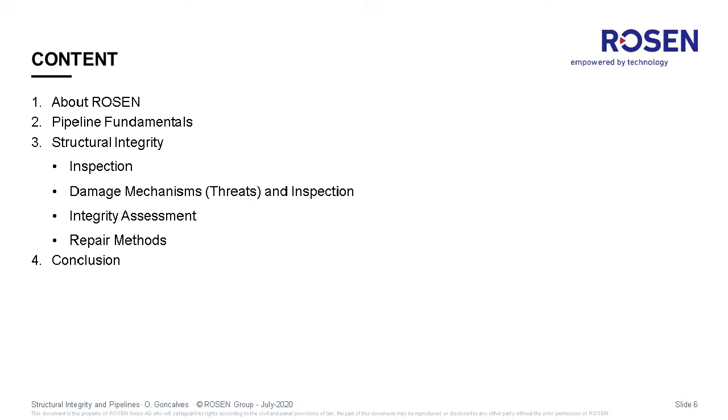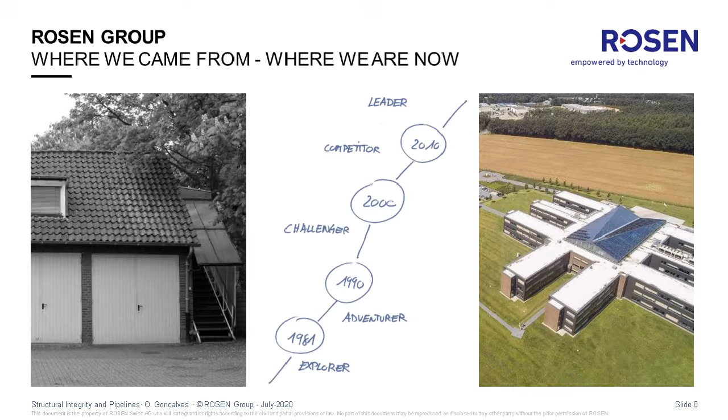Now a bit about Rosen UK. Since this is a presentation for the Northeast, some of you might have heard about MACAW Engineering. MACAW is a traditional engineering and consultancy company that was founded in 1996. And MACAW actually is an acronym that means materials and corrosion and welding. So these are the areas of expertise of the company. And in 2006, it started to do a lot of joint projects with Rosen, especially in the post-inspection work, which is the evaluation, the analysis, and interpretation of the in-line inspection results.

And this partnership worked very well to the point that in January 2017, MACAW became part of Rosen, and now all the services that we provide are under the Rosen brand. Okay.

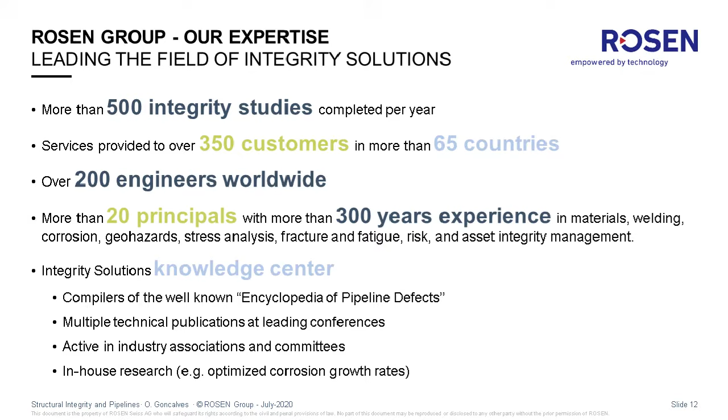Some numbers about the integrity side of Rosen, because Rosen is very famous for the in-line inspection work. For the integrity, maybe not everyone is aware of it, but we also have a big presence in this activity. So we have more than 500 integrity studies completed every year. We have 350 customers in 65 countries. Globally, we have 200 integrity engineers and 20 principal engineers. So quite a big team of specialists in different disciplines related to pipeline integrity and integrity in general. Okay.

Just some idea of some other services that we provide, not all of them necessarily related to integrity: some material testing, stress analysis, flow assurance. We also have a base in Brunswick, which is the test facility, and also an ILI office, which is related to the ILI business, in Silverlink.

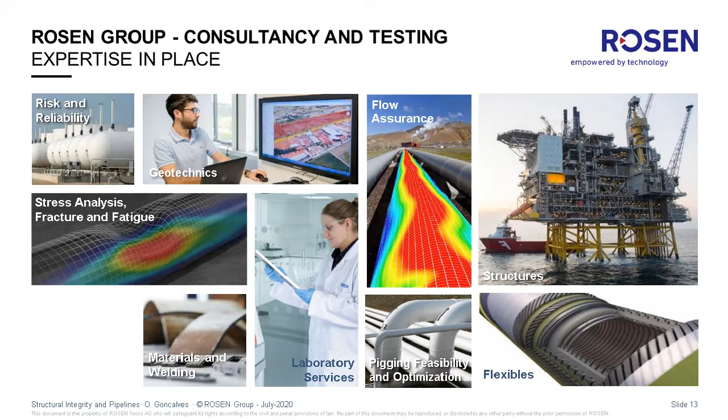Okay, now let's move on to a bit of pipeline fundamentals, just to try to get everyone on the same page. So the basics of pipelines. Pipelines are the more efficient way to transport liquid, gas, and even solid products. For example, slurry pipelines for iron ore. So you mix the ore with water and you can pump it using pipelines, which not everyone is familiar with. Those products can be transported over hundreds of kilometers, sometimes even thousands.

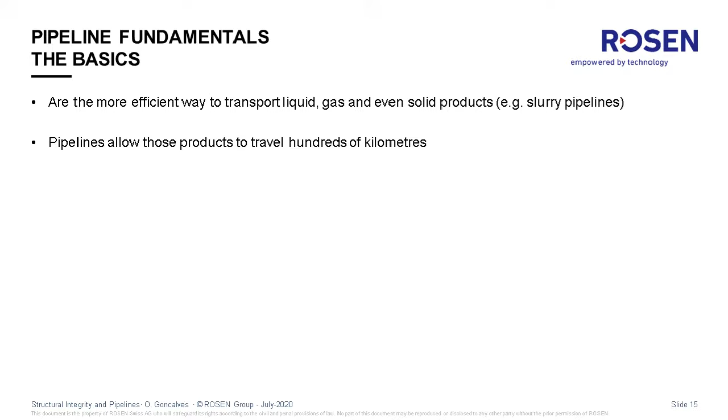In the oil and gas industry, the main purpose of the pipelines is to get the crude oil from the production sites to the refineries, where it is transformed into different finished products. And sometimes in between, you have the terminals that can work as import or export facilities for the crude oil and also for the finished products as well. And another purpose of the pipelines is to transport the finished products from the refineries to the distribution centers.

My focus here is on transmission pipelines, which are usually the ones that cover larger distances, have larger diameters, and operate at higher pressures. So I'm not talking about the smaller pipelines that we have, for example, for city distribution of natural gas that comes to our houses. But some of the principles are still the same.

An important difference between pipelines as compared to other equipment in the oil and gas industry is the fact that pipelines are not confined to an industrial area, so they go beyond and they go over areas that can be sensitive because there might be communities living nearby, and also because there are some environmentally sensitive areas like rivers, forests, and other regions that can be affected if there is an incident, right? In general, pipelines have a very good safety track record as compared to other alternatives to transport hydrocarbons, but unfortunately, accidents still happen.

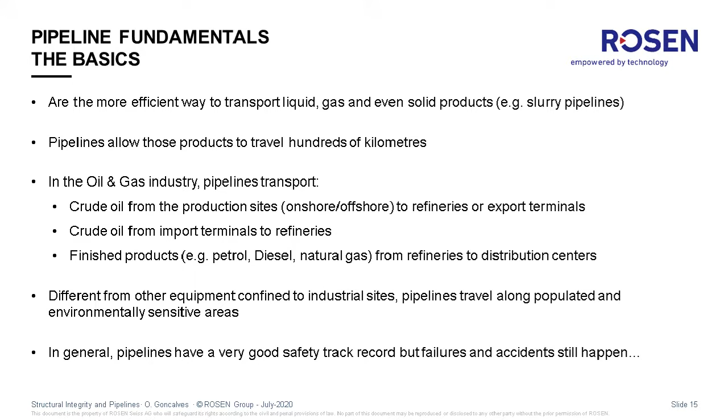And this is an example of a high-profile accident that happened in 2010 in San Bruno, California. Unfortunately, 8 people were killed, 51 injured, homes were destroyed, and other homes were damaged. It was a natural gas pipeline. There was a rupture that was followed by an explosion and fire. It was caused by some not ideal practices during the relocation of a segment of the pipeline, and there were some issues with the material quality, and as a result, there was a flaw in a weld that grew with time by fatigue, and a long time after this installation, there was this rupture that unfortunately was a very severe accident.

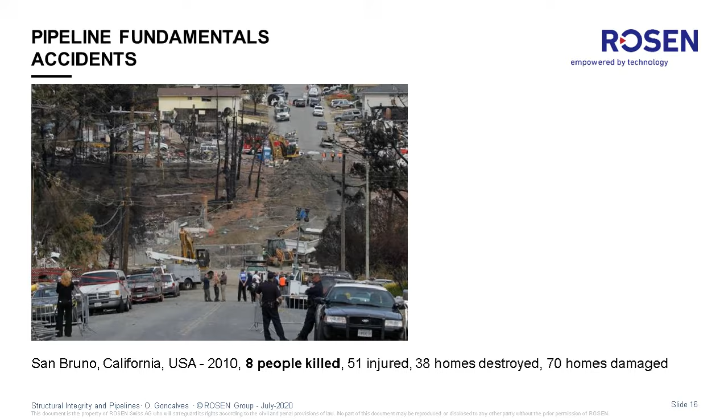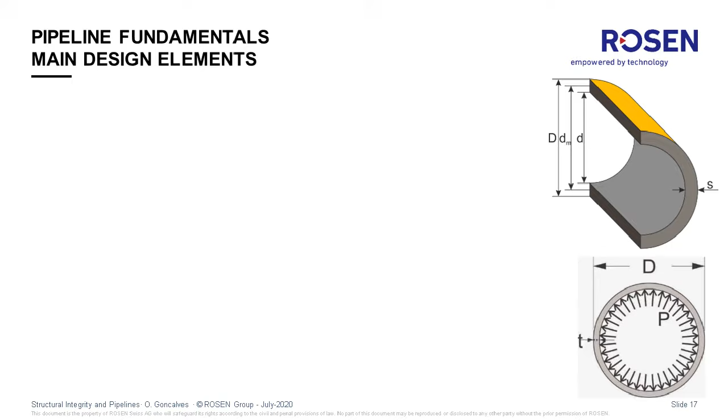Now, I'm going to talk a bit about pipeline fundamentals, just to give an overall idea. There are a lot of details about pipelines, but considering most of its length, it's basically the connection of 12-meter carbon steel pipes that are welded together on site. For most of those pipes, the design criterion is to make sure the pipe can withstand the internal pressure, and it's basically using Barlow's formula, of course, with some design factors to ensure safety and to take into consideration what is around the pipeline and the products that are transported. There are a lot of rules regarding it, but the basic assumption is that the pipeline is under membrane stress, which is the constant stress along the wall thickness.

Those pipelines are buried, which is something important because the first thing is that you don't see them, so they do a good job for you, but you don't have to see them. And the fact that they are buried also gives additional protection. So it's very hard for someone to hit a pipeline because it's buried. But you'll see later on that it's still not impossible. It might happen. The products are pumped by means of pumps for liquid lines and compressors for gas pipelines.

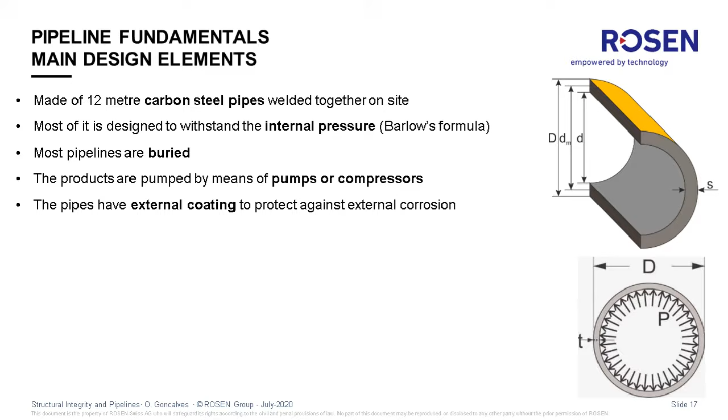Most of the pipelines have an external coating, whose objective is to protect against external corrosion, which is caused by the soil surrounding the pipeline. And as a second barrier for corrosion, there is cathodic protection, because after some time, it is expected that the coating might have some flaws, and in order to protect those areas with flaws, there is the cathodic protection to make sure there is no corrosion, or at least to minimize it, of course.

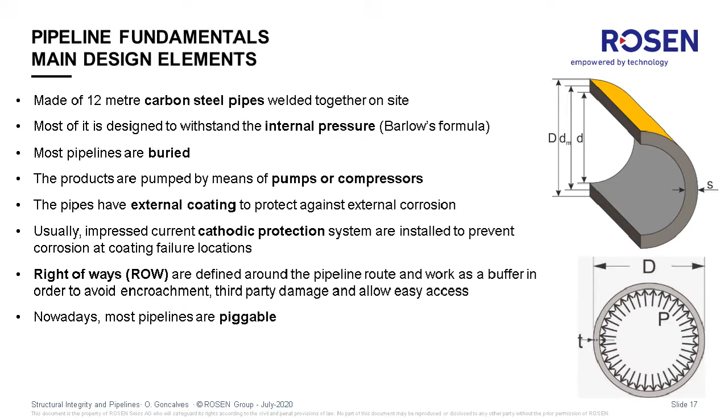And around the region where the pipeline is buried, there is a right of way, which is an area associated with the pipeline, and this area is like a buffer for protection and for easy access. So it's not allowed to have constructions over the pipeline, and then you have this well-defined area that sometimes you can even identify, and there is some signalization that shows that there's a pipeline buried there. So it's another important measure that's part of the design approach for pipelines. Nowadays, most of the pipelines are piggable, which means that you can run ILI tools along them. So we'll come back to that later.

So I'm going to move to structural integrity, the main elements of structural integrity. What is structural integrity? Well, it's basically the ability of the structure to operate according to the parameters it was designed for without any failure. It looks like a very straightforward statement.

Usually, if the equipment had a good design, a good material selection, and a proper,

I cannot see my slide properly right now.

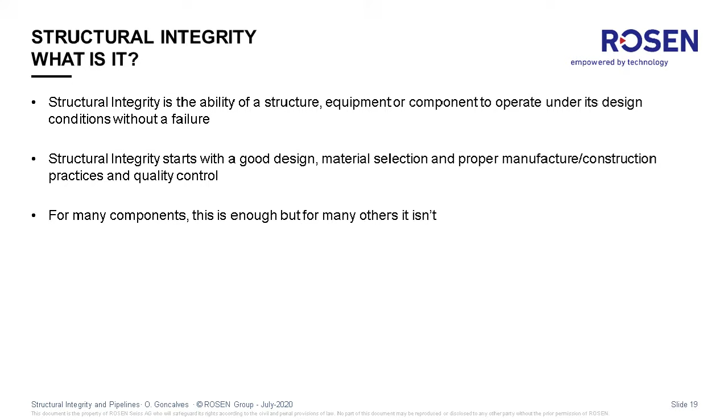Okay, if there was a proper manufacture and construction, that should be a given. There should be no surprises there. But of course, that is not enough in the long run, because for some components over time there might be no modification, no damage, and that's fine. But for other equipment, because of the environments where they are, you might have some issues that might modify the equipment, and it's important for the person responsible for the equipment to make sure it's still possible to operate under the design conditions.

If not, some corrective actions must be taken, or maybe the equipment must be derated, for example, reducing the operating temperature or the operating pressure. And the changes that might happen in a given structure or equipment are caused by damage mechanisms. There are different damage mechanisms, and it depends on the environment the equipment is in.

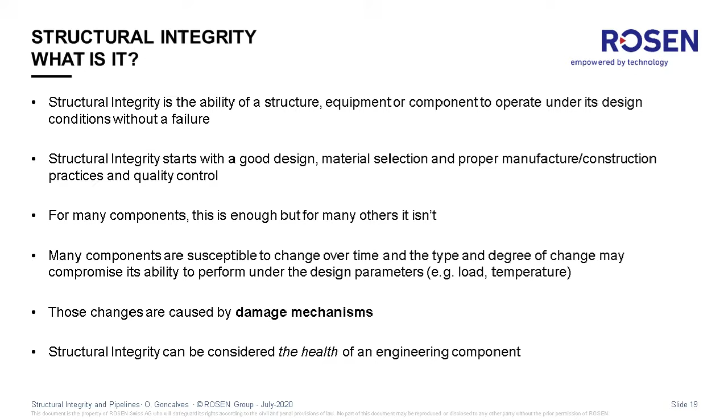So a metaphor I like to use for structural integrity is like health for us humans. It's an indication that your body works well, there are no underlying issues, and you can do everything to the best of your ability. But that is translated to an engineering component. So for that reason, structural integrity must be managed, because if that is not the case and there is an active damage mechanism, failure can happen.

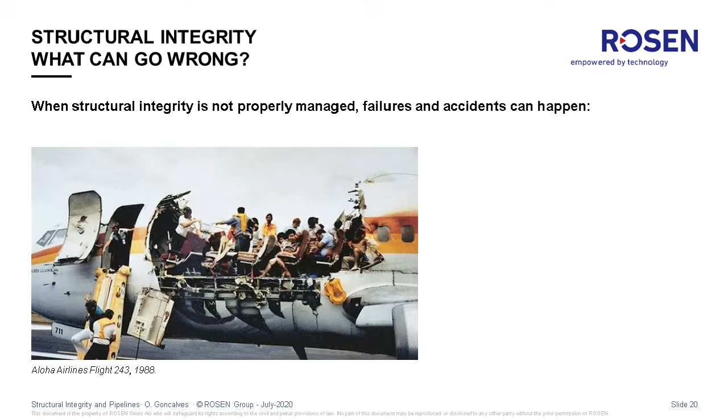This is a very famous example of the Aloha Airlines flight where part of the fuselage disconnected mid-flight. The pilot managed to land the aircraft. Unfortunately, one stewardess was killed because she was not strapped. She was standing, so she just flew away and unfortunately died. But the other passengers were okay. It was caused basically by fatigue damage, and this fatigue damage was also accelerated by a corrosive environment. Right? It's a very interesting case to study.

Well, now I'm going to move on to the elements of structural integrity. The main elements of structural integrity are the damage mechanism that I already described, which is what causes damage and might affect your equipment. Prevention is a very important part because it's a way to take actions that might minimize the damage mechanisms. After that comes inspection, which is a way to make sure that everything is going well. You cannot just hope for the best. You have to always check to see if there's anything going on that might not have been expected in design, for example.

Then comes the assessment. The assessment is where you look at the inspection results and you have to identify how serious whatever you find is. So if you have, for example, corrosion with a 50% metal loss, is that a reason for concern? Is it okay? So for that, you need some assessment tools to evaluate the damage caused by some defects, some indication you can find in your equipment.

And the last resort is the repair, when as a result of the assessment, you realize that something must be done in order to reestablish the full capacity of your equipment. So it's usually a replacement or some reinforcement in your structure or component.

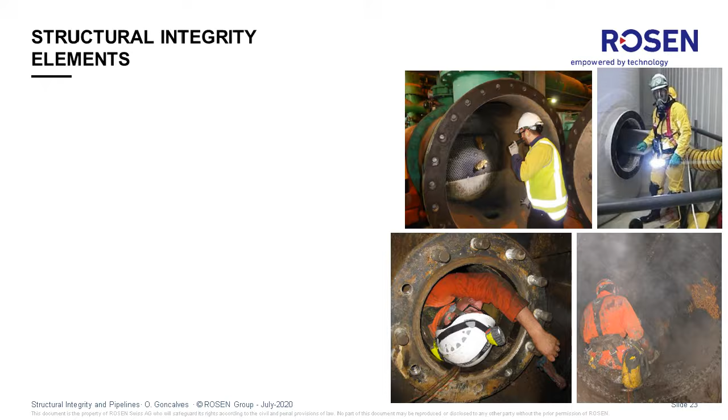So I'm going to talk a bit about inspection. In more traditional equipment, especially in the oil and gas environment, the inspection.

Sorry, I cannot see the slides very well.

It's a process that allows the damage mechanism to be identified and quantified. It's primarily visual and complemented by non-destructive testing.

External inspection usually can be done with the equipment in service, but for internal inspection, it's required the equipment to be shut down, cleaned, and the inspectors need to come inside the equipment to look and see if there is any damage. So the images show that it's not an easy job whatsoever.

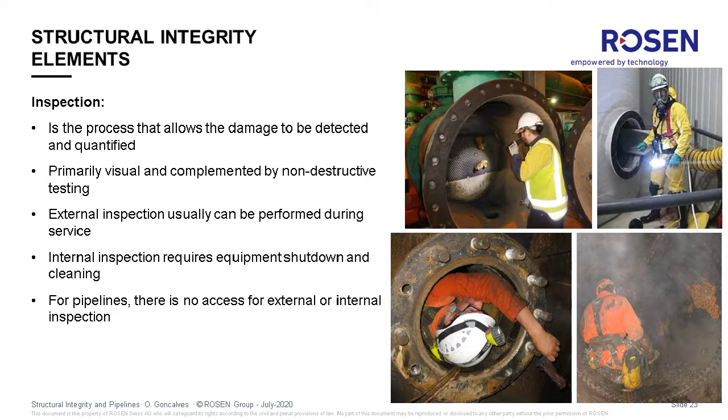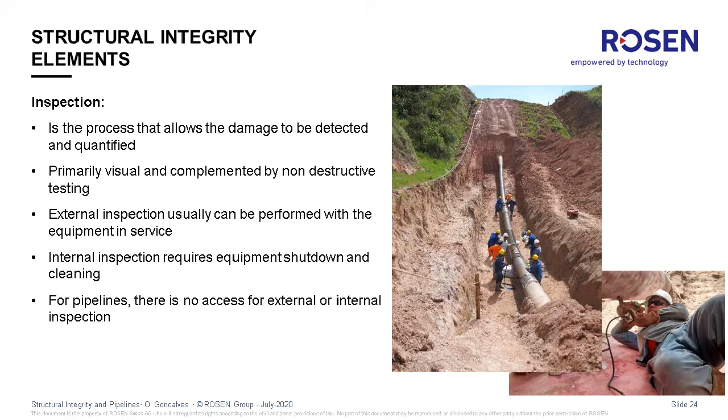For pipelines, it's a bit different because unfortunately there is no access for external and internal inspection. Well, actually there is access for external inspection, but as you can see, this is not straightforward. If you want to have a look at a small section of a pipeline, you have to make a big hole and get inside and do the inspection. So the traditional approach for inspection of process equipment in petrochemical units doesn't work for pipelines. So we need something else.

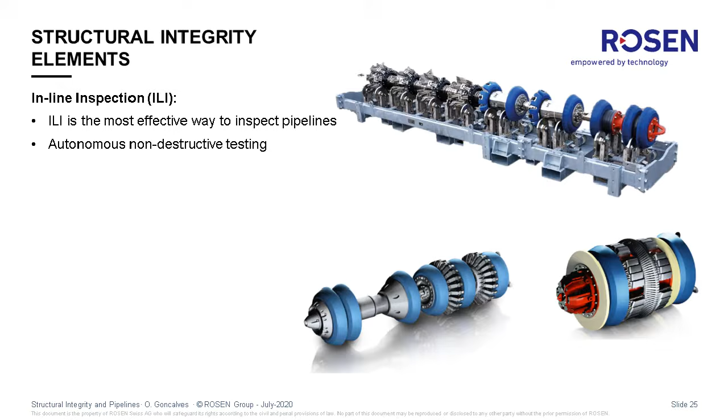But fortunately, we do have something else, which is inline inspection. Inline inspection is a technology which is around for some time. It's the most effective way to inspect pipelines. It is basically an autonomous, fully automatic, non-destructive testing. The tool travels inside the pipeline. It's moved by the transported fluid. There is no disruption for the pipeline operation. Sometimes it's necessary to reduce the flow rate in order to avoid overspeed of the tool, which might compromise the inspection quality. But in most cases, even that is not necessary.

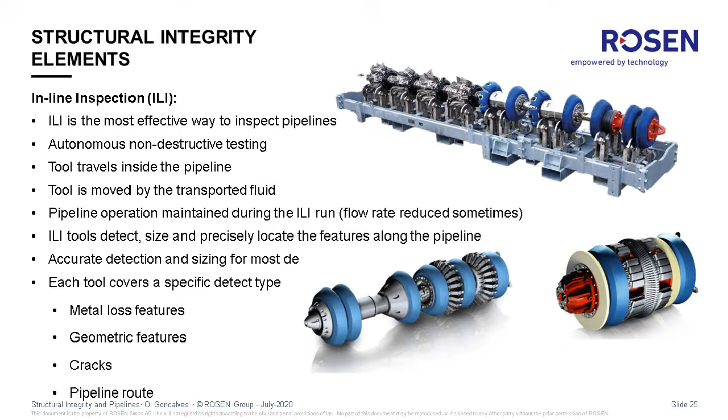The tools can not only detect, but they can also size and they can very accurately locate features along the pipeline. So the previous picture was a field verification that was pointed by the ILI results, because all the data is saved and there is a report that tells the details about the feature that was detected and its location. And as I said, the detection and sizing is very accurate for most types of defects. Some defects are more difficult to size and detect. So each tool covers specific types of features. The most common are those for metal loss features, geometric features, cracks, and to record the pipeline route.

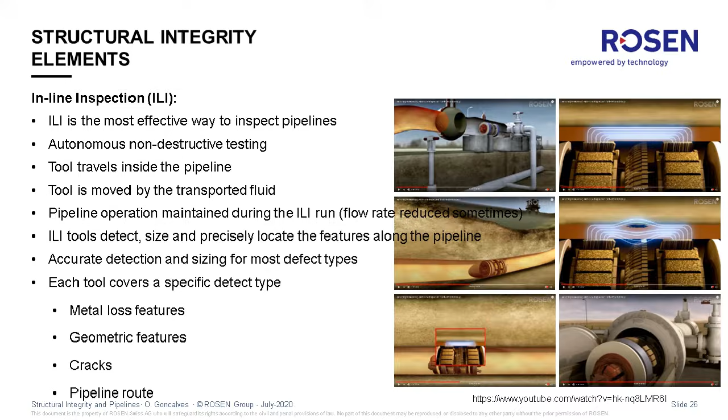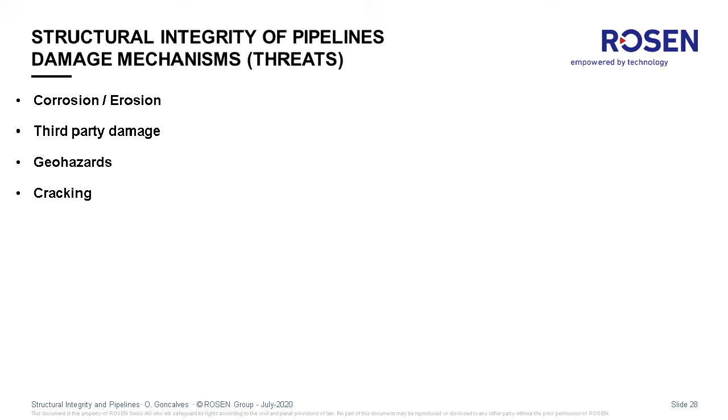So now I'm going to talk a bit about damage mechanisms and still a bit about inspection. The main damage mechanisms are corrosion, erosion, third-party damage, geohazards, and cracking. Corrosion erosion is by far the most common damage mechanism in pipelines and can occur both internally and externally. The causes, of course, are different. On the internal side, it is associated with the product being transported, and on the external side, it is associated with the interaction of the metal surface with the soil, if there is a flaw in the coating, and if the cathodic protection is not effective at that specific location. It can cause local or general thinning.

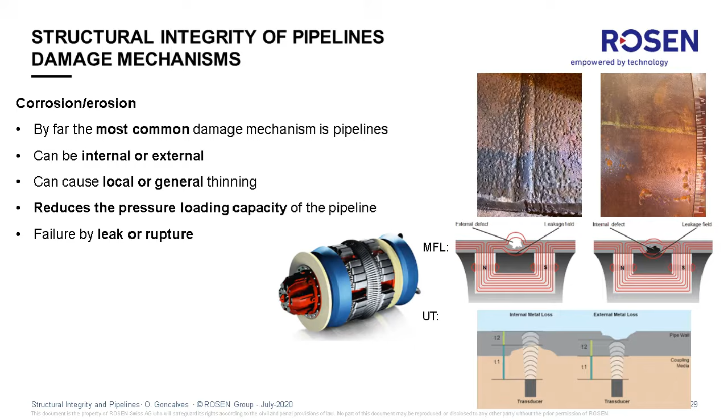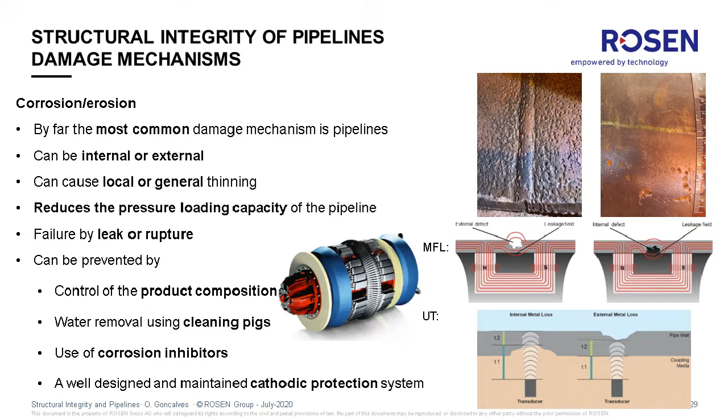The consequence of the corrosion is a reduction in the capacity of the pipeline for loading in terms of pressure, and it can lead in the end to a leak or a rupture, depending on the dimensions and the mechanical properties of the pipe. It can be prevented by control of the product composition, water removal, also using cleaning pigs that basically drag the water away from the pipeline, because water presents a big contribution to internal corrosion. Also the use of corrosion inhibitors can help to avoid internal corrosion. And of course, a well-designed cathodic protection system.

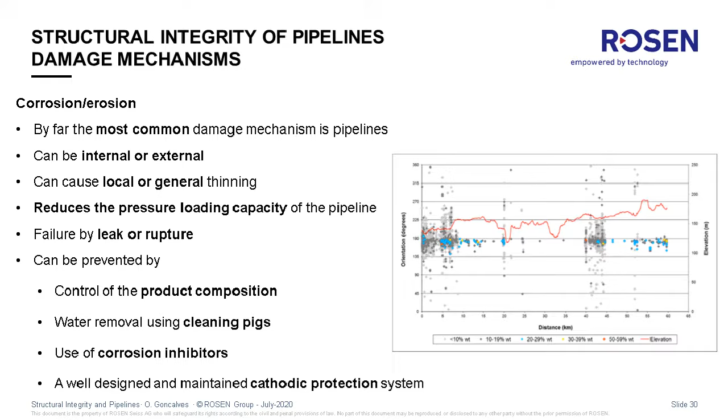This is an example of an ILI result where each dot here is a feature along the pipeline, which is the x-axis. The y-axis shows the clock position around the pipeline circumference. So you can see a concentration of features in the bottom of the line, because being a crude oil pipeline, the water is usually on the bottom because it's heavier than the crude oil, and then there is a concentration of features there. I'm going to have to speed up a bit.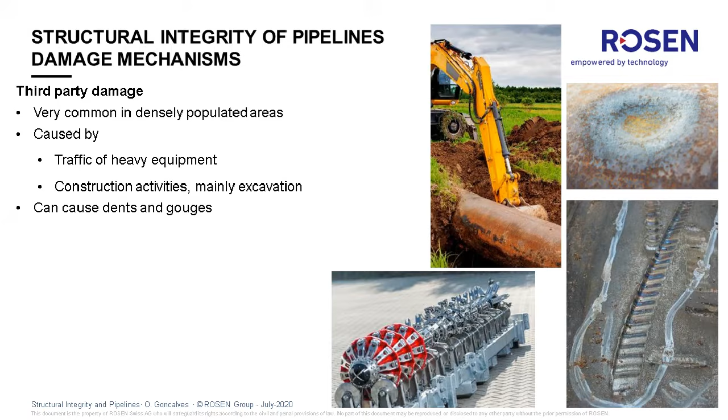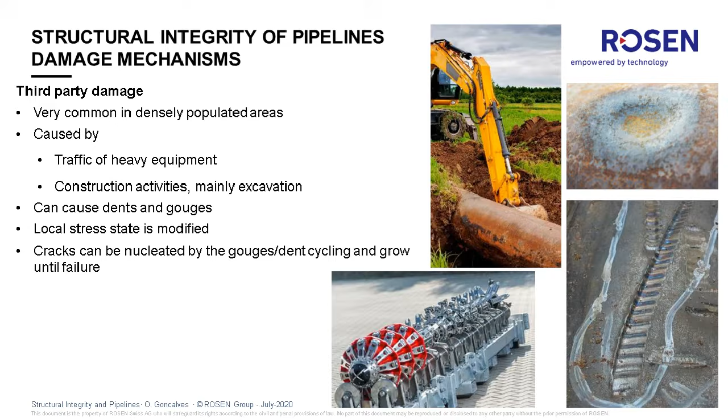Another type of damage mechanism is third-party damage, which is when something hits the pipeline and causes a dent. It can also cause a gouge, where there is also some removal of metal, and that gives rise to a different stress state. And because of the pressure fluctuation in the pipeline, that can lead to fatigue and failure. There is a specific tool, the caliper tool, that can detect this kind of feature. It can be avoided with signalization, patrolling the right of way, and even barriers to add another layer of protection to the pipeline.

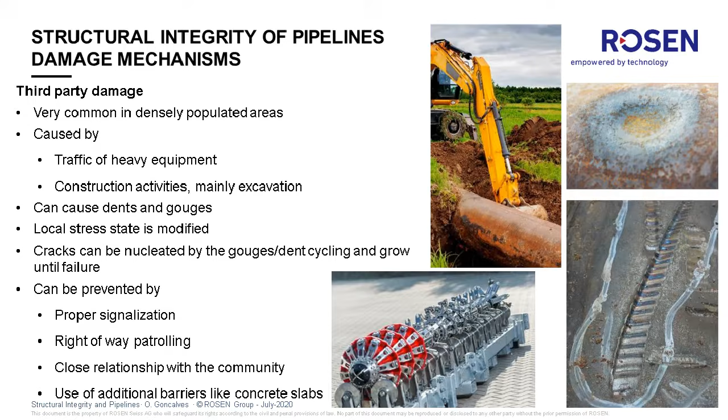In order to prevent them, some stabilization structures can be built in sensitive areas, and also some draining systems can avoid the accumulation of water, which causes the instability.

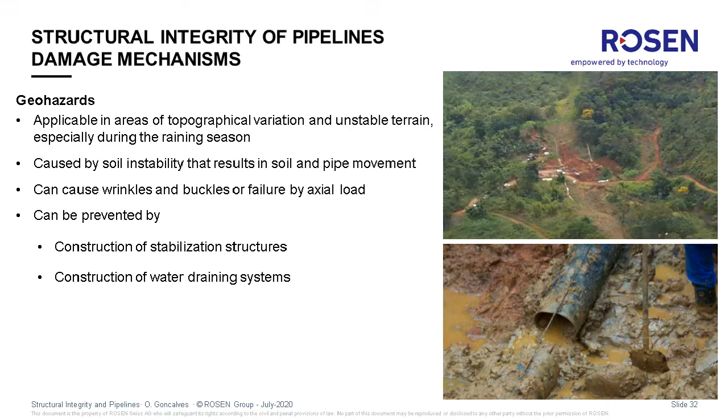Let's move on. Time is running out.

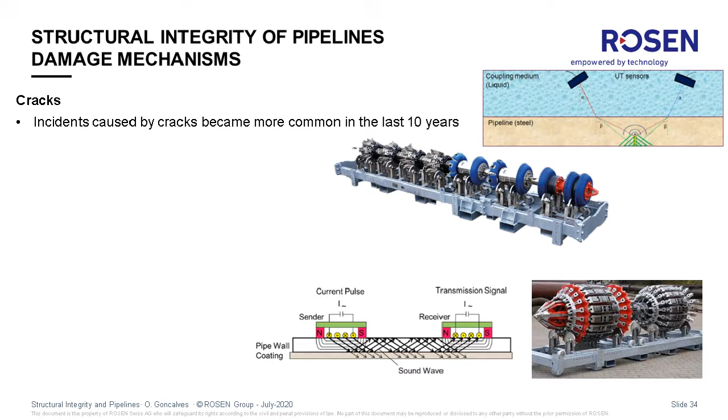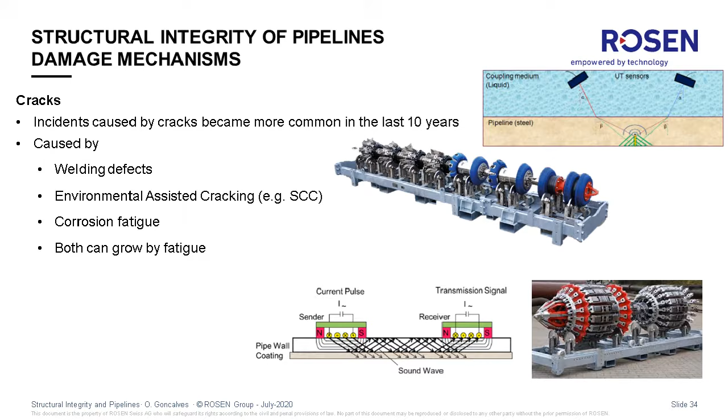Now, regarding cracks, cracking issues started to become more common in the last 10 years. There are different types of cracks that can be present in the pipeline. Most of them are caused by welding defects, also by environmentally assisted cracking like SCC, stress corrosion cracking, corrosion fatigue, and any crack can potentially grow by fatigue due to pressure fluctuations and pressure cycling in the pipeline operation.

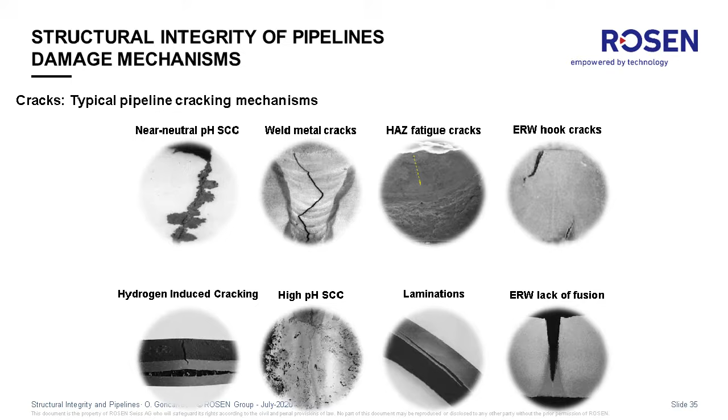So here you can see different types of cracks with different mechanisms and different morphologies. So it's very challenging to address, because in terms of detection, they can be detected, but they cannot be distinguished. So there must be an additional engineering assessment and judgment to deal with those features.

I'm going to have to speed up.

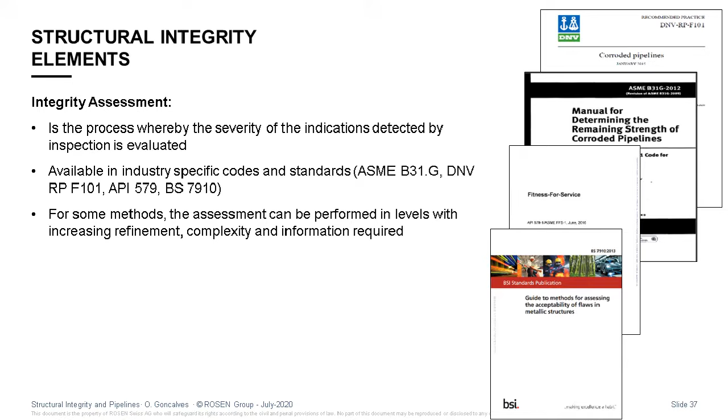So basically, now I'm talking about integrity assessment. There are a lot of methods that assist in the interpretation of the different defects or indications that you can find in the pipeline in order to see if they are acceptable or not. They are based on stress analysis, fracture mechanics, and other methodologies to see if the equipment can still withstand the design loadings. So these are some examples of some calculations to evaluate corrosion defects.

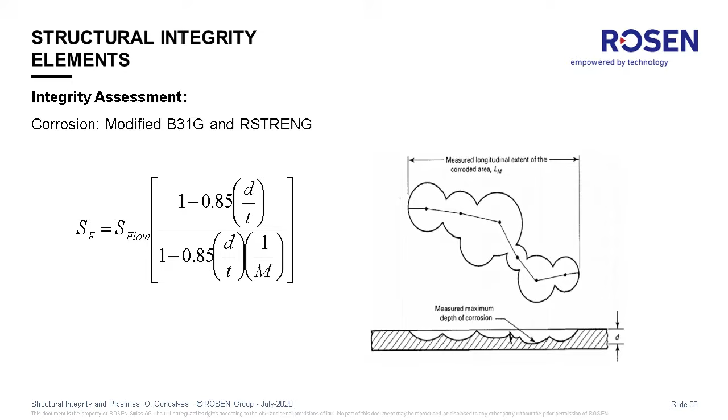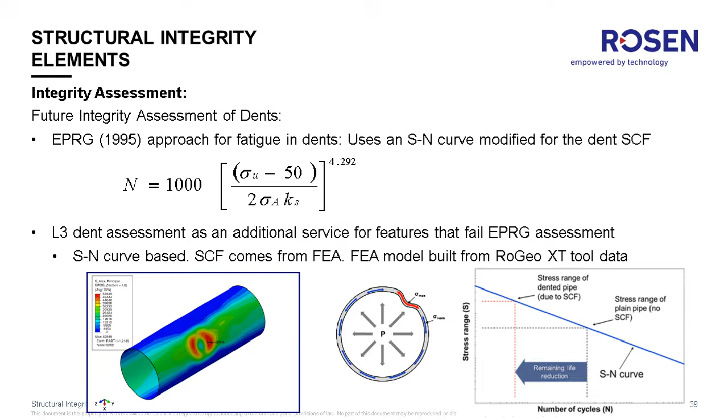This is now an example to evaluate fatigue damage in dents. So there is a more simple approach and then a more sophisticated approach where the ILI information from the geometric tool, the caliper tool, can be used to create an FE model and get a more refined stress concentration factor that can then be used in a fatigue study. And all of that can be done without any excavation, which is very interesting.

And then for crack assessment, we use the methodologies that are based on a fracture mechanics approach, like the failure assessment diagram that is incorporated as a procedure in both API 579 and also BS 7910.

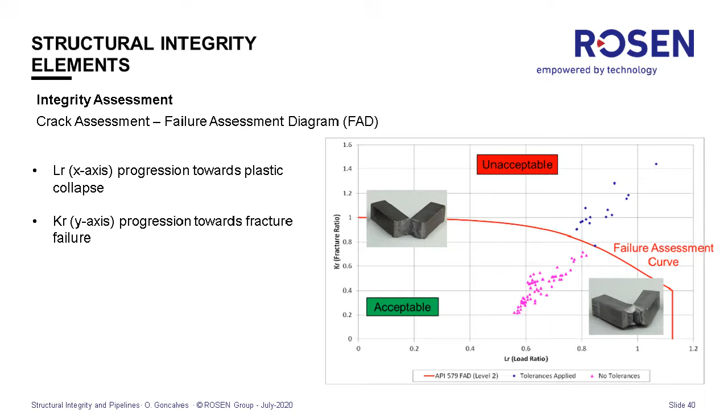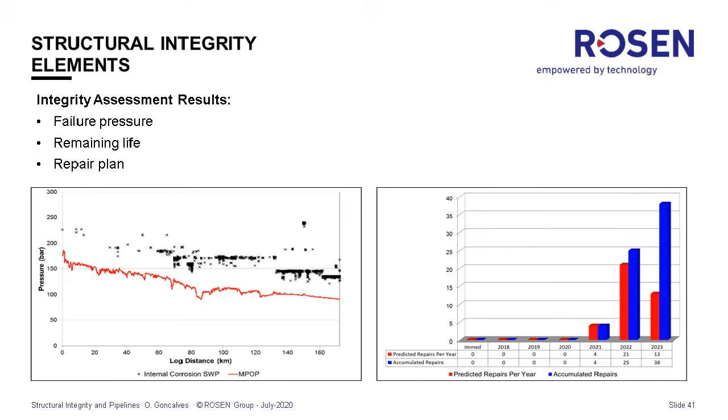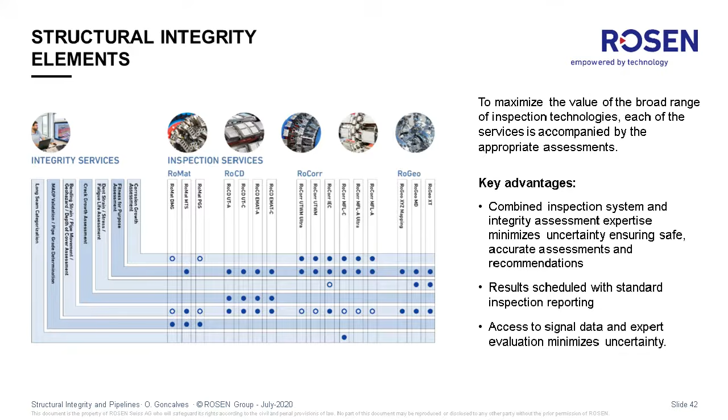I'm going to jump this one. This is basically the integrity service that can be used based on information that comes from specific ILI tools.

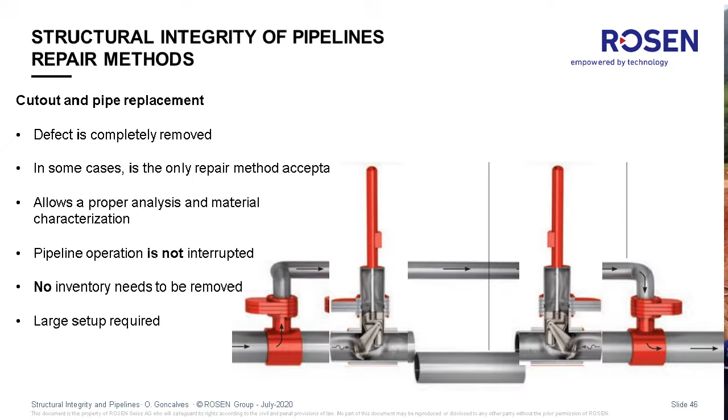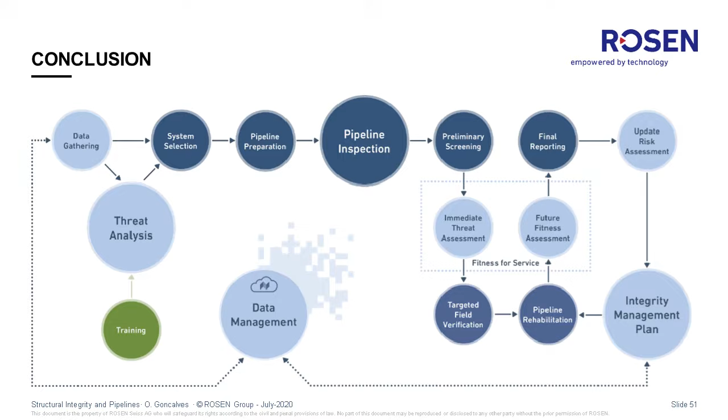Well, repair methods. Unfortunately, I'm running out of time, but we have the replacement, a replacement that keeps the pipeline operating, welded sleeve, composites, buffing for removal of cracks, recoating, which is always used, and then an overall approach where we should look at all the data to have a broader understanding of how your pipeline behaves and to manage the integrity better. So pipelines are very important, are very safe, but their failure can have serious consequences, and that should be avoided with a proper integrity management approach.

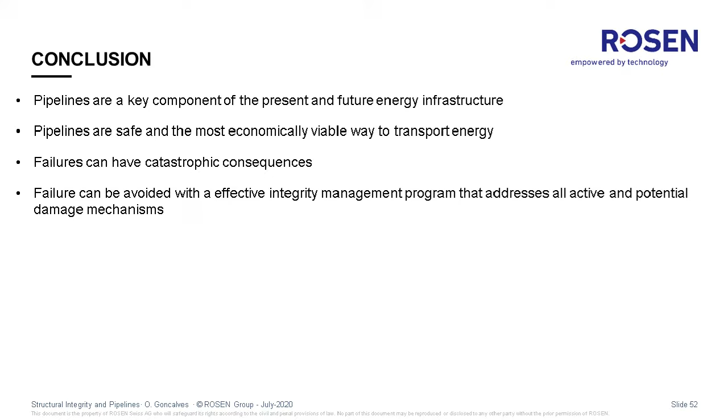Sorry for going over the time.

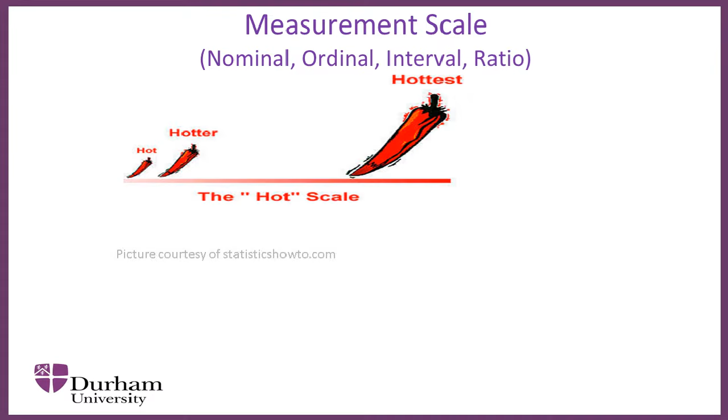Some of you might know the quote from 1918: if a thing exists, it exists in some amount, and if it exists in some amount, it can be measured. There are four data measurement scales: nominal, ordinal, interval, and ratio. The nominal scale is used for labeling variables without any quantitative value. Examples of nominal scales are gender, hair color, and where you live.

A good way to remember all of these is that nominal sounds a lot like name, and nominal scales are kind of like names or labels. Ordinal scales are typically measures of non-numerical concepts like satisfaction, happiness, discomfort, and so on. The slides showing here, the hot scale and the pain scale, are two good examples of these. With ordinal scales, the order of the values is what is important and significant, but the difference between each one

is not really known. The other scale, interval scales, are numerical scales in which we know both the order and also the exact difference between the values. The classic example of an interval scale is Celsius temperature, because the difference between each value is the same. For example, the difference between 60 and 50 degrees is a measurable 10 degrees, as is the difference between 80 and 70 degrees.

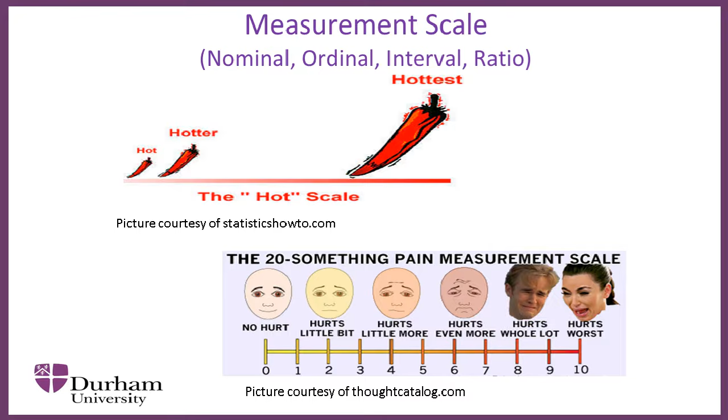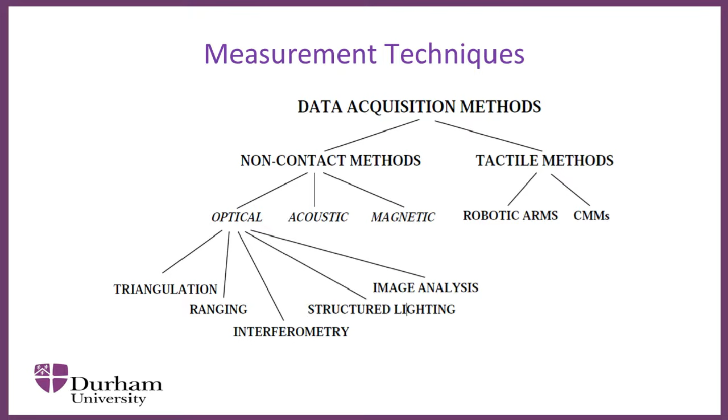When we're looking at the measurement techniques, we first look at the data acquisition method. Normally, data acquisition techniques are classified as non-contact methods and tactile methods, sometimes also called contact methods. The non-contact methods, depending on the data being acquired, can also be classified as optical, acoustic, and magnetic methods. For the oil pipeline crack detection, we will use both acoustic and magnetic methods for the measurement.

I'm just talking a little bit about the problems here. Oil pipeline leakage is a major environmental concern, therefore a safe and reliable pipeline network is vital. Currently, the average age of oil pipelines in the USA is over 50 years. Due to various causes, more than 110 million US gallons of crude oil and petroleum products have spilled from the USA mainland pipeline network alone. Underwater pipeline leakage could bring even more consequences to the ecosystem.

So early detection of potential pipeline leakage is very important, not just for environmental concerns, but it will also have a big economic benefit. The figure on the right-hand side is a photo of the Enbridge Line 6B, which ruptured in July 2010 and spilled 20,000 barrels of oil into the Kalamazoo River in Michigan. This became the largest inland oil spill in U.S. history.

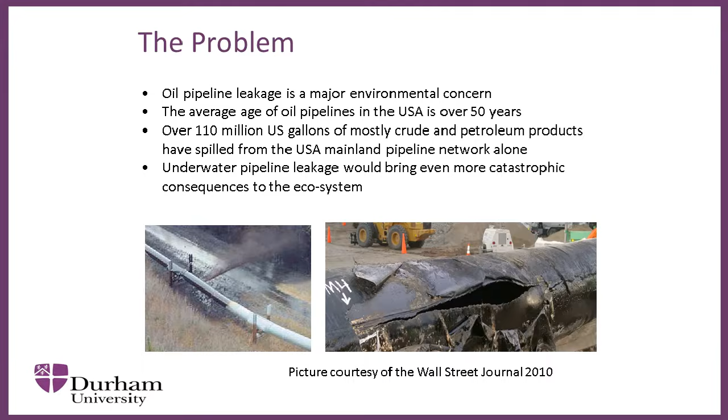Talking about the situation in the UK, the UK Onshore Pipeline Operators' Association, UKOPA, are the regulators for UK pipeline product loss. They published a report in 2018, and the two figures I put in here are from their report. The left one shows the failure frequency during the period from 1962 to 2016, which is 0.212 incidents per 1000 kilometer years. For the last 5 years, 2012 to 2016, it is 0.087 incidents per 1000 kilometer years.

In order to see the result over the recent period, the moving average for each year is calculated with reference to the incidents from the previous 5 years, for example 2012 to 2016, 2011 to 2015, or 2010 to 2014, etc. The figure on the right-hand side shows the development of the product loss incident frequency by cause.

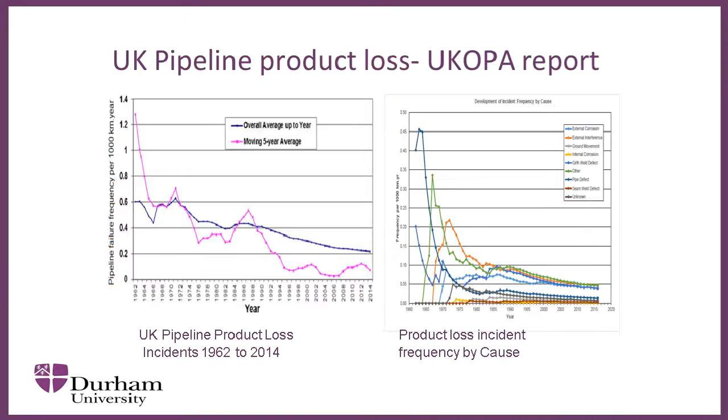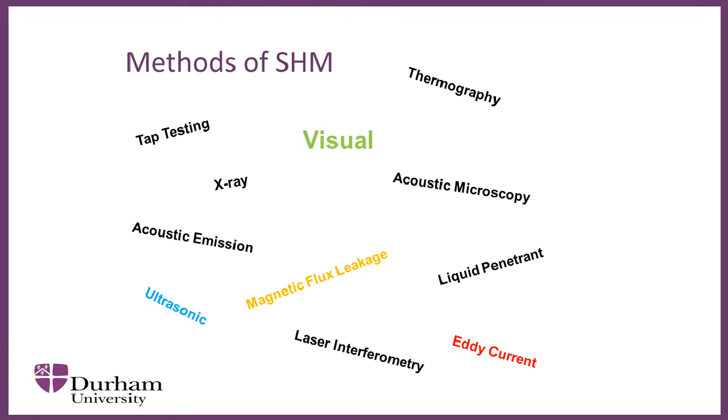When we're talking about methods used for structural health monitoring, a lot of people use different measurements. I listed here a few of the methods commonly used in the oil and pipe industry. One in particular is ultrasonic, which can be used for flaw detection, dimensional measurement, and material characterization. This method is very sensitive to surface and subsurface discontinuities. It also has high accuracy and can measure the location, size, and shape of the defect.

It can also produce a detailed image of the defect. But the disadvantage for this type of application is the surface must be accessible, depending on the condition where the pipeline is laid, and extensive training is needed to master this technique. It is also difficult to inspect materials that are rough, irregular, thin, small, or non-homogeneous. Every technique listed here has advantages and disadvantages, depending on the application, location, and structure of the pipes in which we need to detect cracks.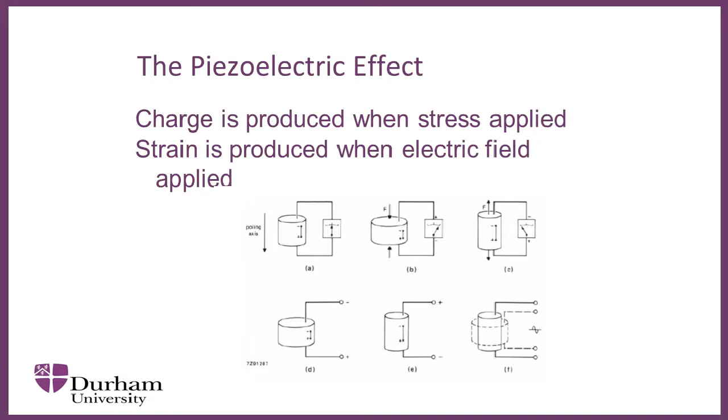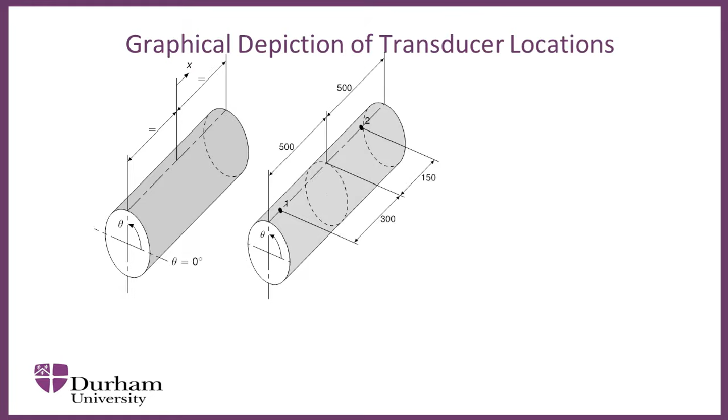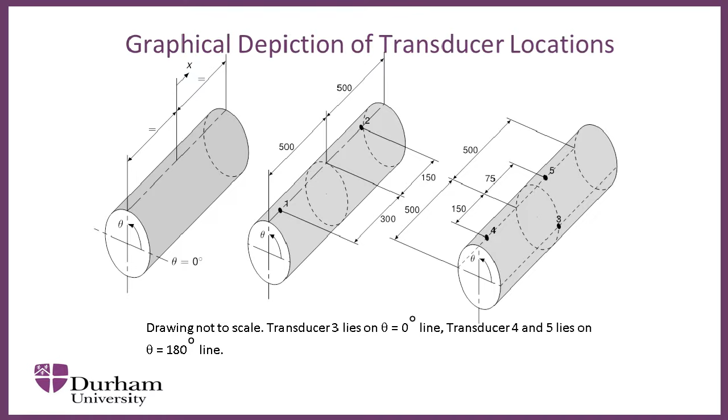For the experimental configuration in this work, a mild steel pipe was used, which has a length of 1 meter, an outer diameter of 101.64 millimeter, and a wall thickness of 2 millimeter. The coordinate system used to indicate the location of the transducers and the holes drilled to simulate the damage is described in the figure. We put 5 patch transducers, and their locations are shown in the figure: 1, 2, 3, 4, 5 at different locations on the pipe.

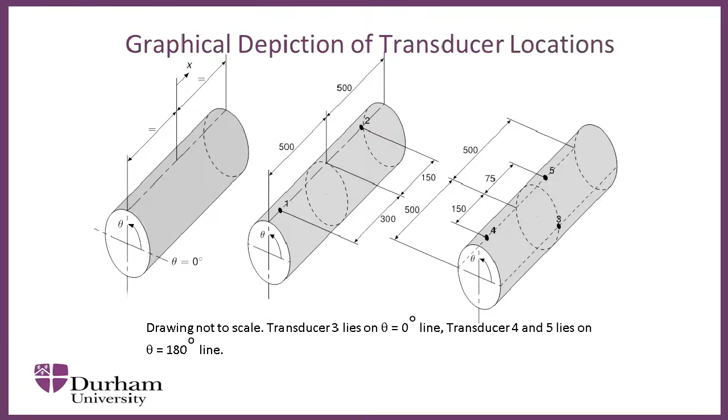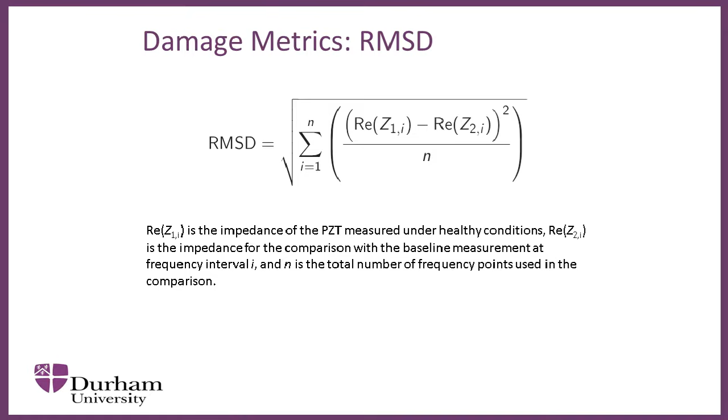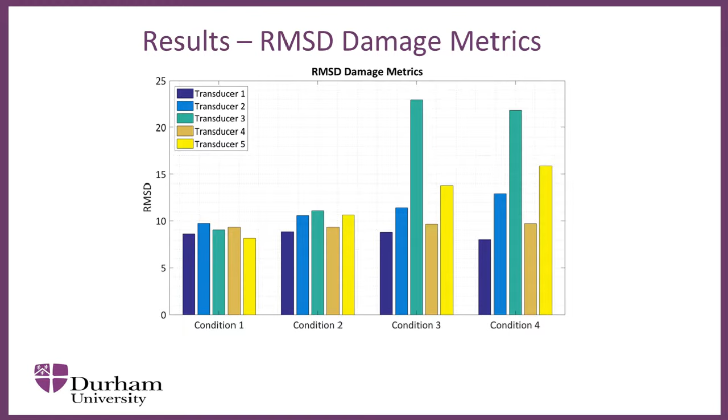In order to quantify the damage, a damage metric RMSD for each damage condition was computed for each transducer. The RMSD damage metric is the root mean square difference of the damaged impedance from the baseline over the frequency analyzed, where Re(Z1,i) is the impedance of the PZT measured under healthy conditions, Re(Z2,i) is the impedance for comparison with the baseline measurement at frequency interval i, and N is the total number of frequency points used in the comparison.

The figures show the RMSD value obtained for each transducer for each of the damage conditions. As the RMSD is a measure of the damage, the higher the value, the more severe the damage. The damage under condition 1 and condition 2 was a 2 mm diameter hole and a 4 mm diameter hole at x equals 0 and theta equals 90. It can be seen that the damage metrics obtained under condition 2 are in general higher than those obtained under condition 1.

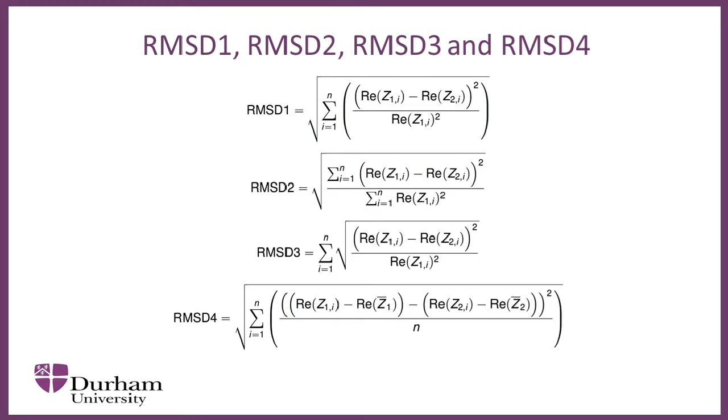Over the years, a number of researchers have proposed various damage metric equations to provide better correlation between the metric and the degree of damage. Primarily, they are variations of the basic statistical model, and the more common ones, which I listed here, are RMSD1, D2, D3, and D4.

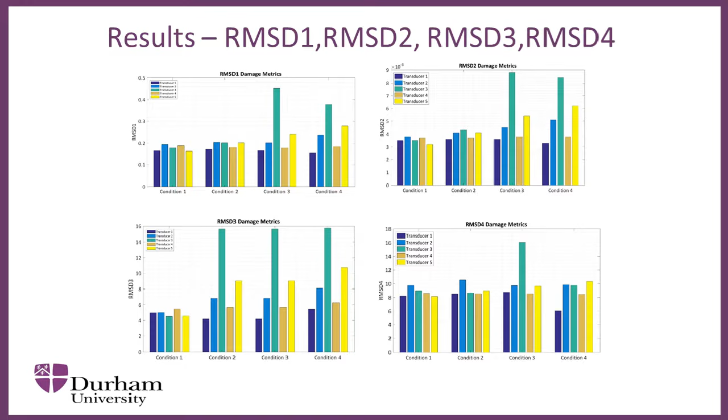Coming to presenting the results, the values of these damage metrics were computed from the impedance measurements obtained from all transducers for all the damage conditions. You can see figures A, B, C, and D, showing the RMSD1, RMSD2, RMSD3, and RMSD4 damage metrics respectively. They are not that much different, but the green bar is significantly different for all the measurements.

You can see that figures A and B show the RMSD1 and RMSD2 metrics. The trends shown by figures A and B are such that there is no difference in the metric obtained under all conditions for transducers 1 and 4, and an increase in the metric with increase in damage can be observed for transducers 2, 3, and 5. Figure C shows the RMSD3 metric, and figure D shows the RMSD4 metric.

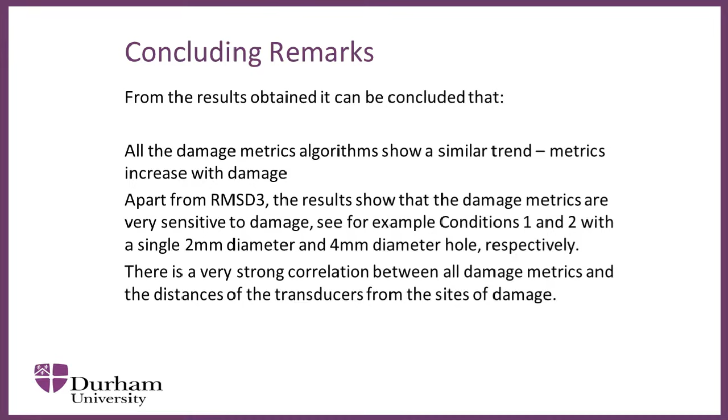From the results obtained, it can be concluded that all the damage metric algorithms show a similar trend: the metric increases with damage. Apart from RMSD3, the results show that the damage metrics are very sensitive to damage. See, for example, conditions 1 and 2, with a single 2 mm diameter and 4 mm diameter hole respectively. There is a very strong correlation between all damage metrics and the distance of the transducer from the site of the damage.

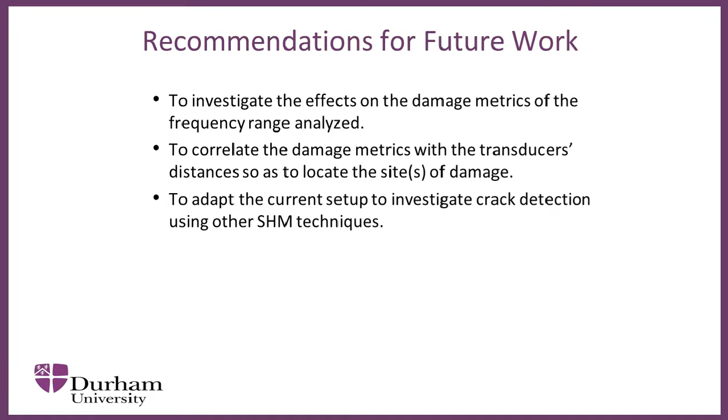Although the results obtained in the present work have demonstrated that the impedance-based method can be used to detect cracks in pipelines, we propose the following work, which might improve the efficiency of pipe inspection using PZT transducers. The first is to investigate the effect of the frequency range analyzed on the damage metric. The second is to correlate the damage metric with the transducer distance so as to locate the site of the damage. The third is to adapt the current setup to investigate crack detection using other structural health monitoring techniques. So I think that is everything for my presentation.